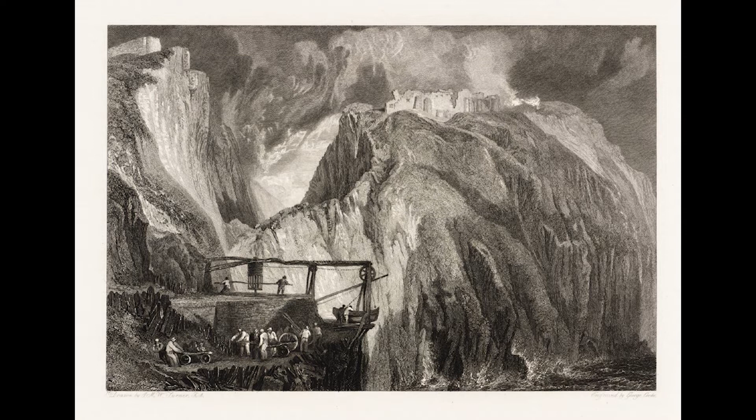By the Victorian times, it was a ruin. But then tourism was happening, and the trains were happening, and people started getting interested in tourism and going to see these sites. This was Turner. It was actually an etching after a Turner painting. But it showed that, and Tennyson went there and wrote poems. There's this increasing interest, and there's another Victorian layer to this site that was applied on top, while still being a functioning industrial port that was still trading tin and slate with the rest of Europe.

So we were confronted. That was it. We're on the shortlist. We go down. We meet Nichola, and she explains all of the issues with the site. And as designers, our first question was, help, how on earth are we going to build something here? There's no vehicular access. It's a site of special scientific interest. It's a scheduled ancient monument. It's every single acronym you could possibly think of. It has it. And there we were supposed to build a 65-metre bridge between two crumbling cliff faces.

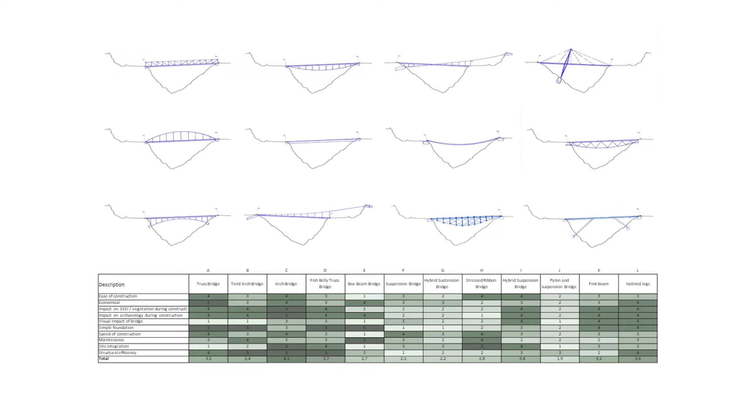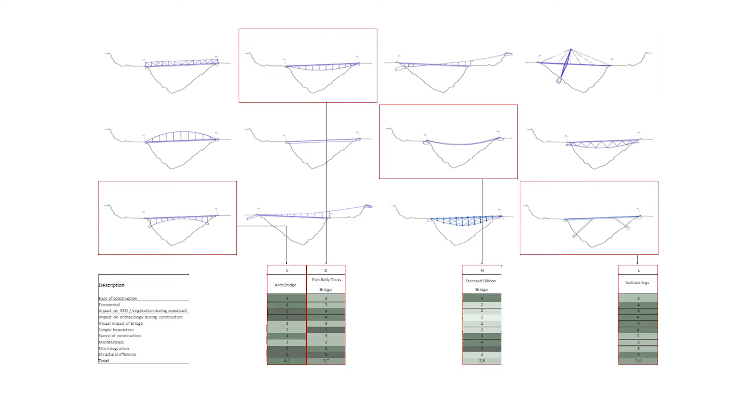It's a long drive down there, 5 hours, and we had a long drive back. And we came up with lots of ideas, which my colleague Florian was noting in the back, and we debated them. I won't go through the debate, but we then started scoring them and being quite analytical about this. A 5-hour car journey with an engineer is often quite analytical.

And there's a simple problem. The mainland on the left, 3 meters higher than the island on the right. So just to get my DDA bit in, 60-meter gap, 3 meters. It's already a 1 in 20 slope. And how are we going to link the two?

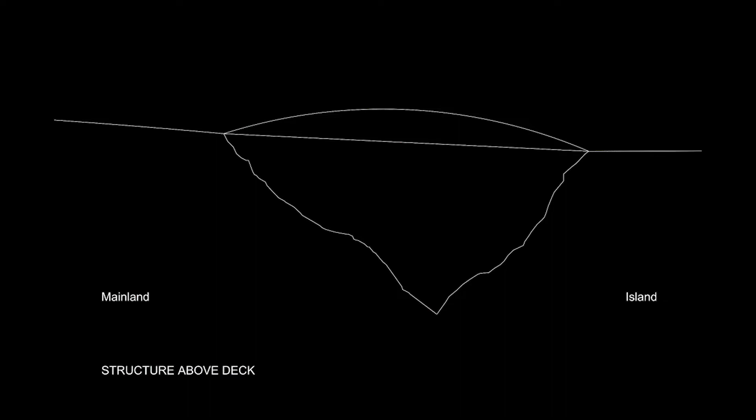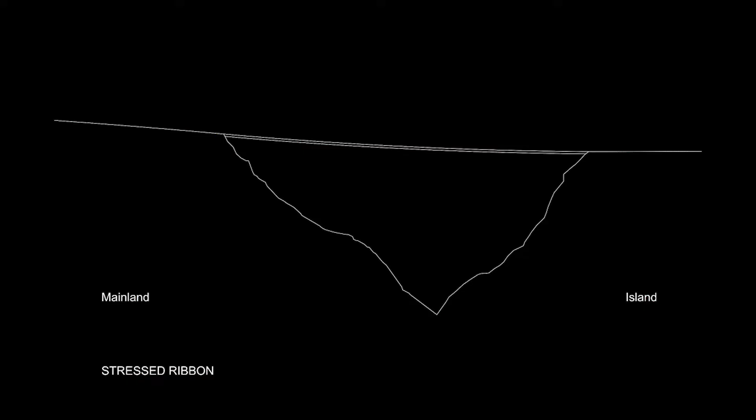First thing we agreed on is the structure should not be above the deck. We felt that we wanted that idea that you fly at some point. And so the structure, be it an arch, be it suspension cables, be it whatever it is, it should not be above the deck. That was inappropriate. I have to admit I was slightly smitten by the idea of a stressed ribbon bridge, which is quite a simple bridge. You stretch 2 or 3 or 4 or 5 cables between 2 sides, pull like a beast, and lay some deck on top.

Unfortunately, Laurent convinced me that the cliffs weren't going to take this. The cliffs were going to fall apart, and above all, we had an issue with the slope from one side to another, and that we couldn't make it. The idea wasn't to be completely DDA compliant, but at least step free from one side. Laurent liked the idea of an arch, as quite a traditional form in some way.

And the main issue with something like an arch is that it only fully functions when it's complete. So you have this temporary state as you're building it, when you need lots of formwork to hold it up. And how on this cliff, with the waves, et cetera, and above all the fact that we couldn't really do any temporary formwork, how are we going to build an arch?

And a boring factor about an arch is that when they expand thermally, they generally go up. They have to push up at the top, which meant that we'd have drawn a straight line from one side to another. And I felt that it was very important that actually this should be a fluid walk. When you come down from the mainland, you came down onto and hit the island in a smooth curve like that, as opposed to going up in the middle. We had some lengthy arguments about this and how I was fighting physics, and I really shouldn't be fighting physics.

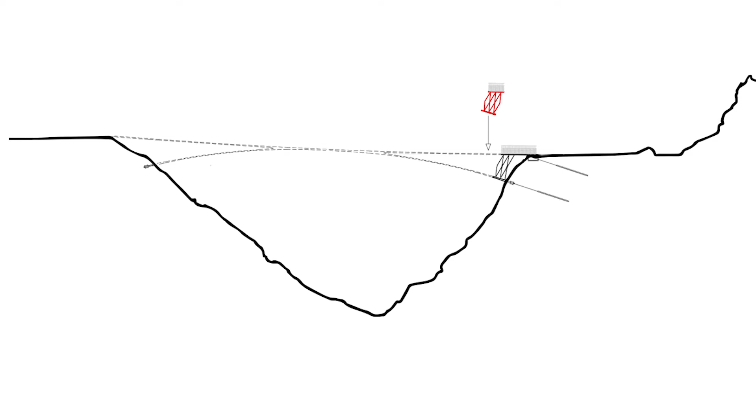Now, cantilever bridges, nothing new. Julius Caesar's favourite type, apparently. The Forth rail bridge is obviously the most famous cantilever bridge in the UK, where you reach out. There they had a little central span, but it's broadly the same principle. And it enabled us to build the bridge in segments. So we could divide the bridge up into 10, 15 segments, install one, and at any stage, if a storm came in, the bridge would be stable, and it didn't need any temporary formwork to hold it up. So this was it. This was the solution.

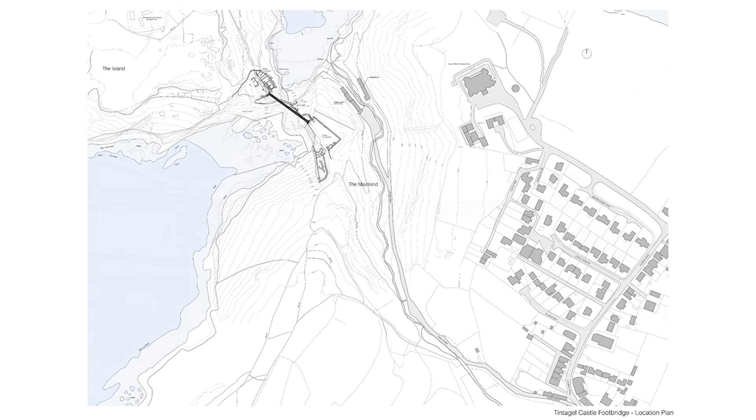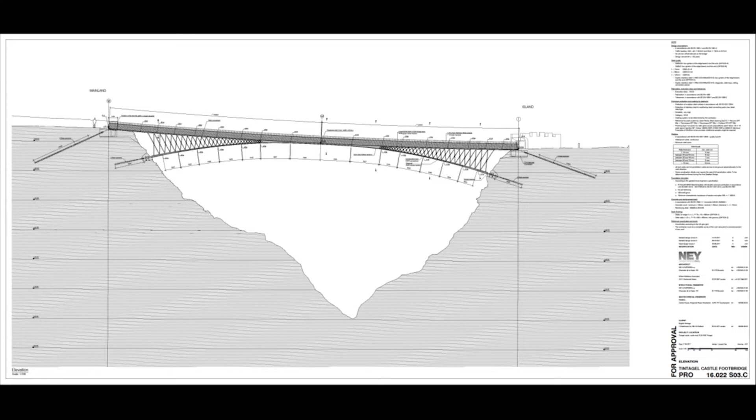In elevation, as said earlier, we divided the bridge up into 15 segments. We'd originally intended it to be a welded construction, but then went, for ease of construction, of installation, to bolted connections at each segment.

As a cantilever, this is the bit where my engineer friends are going to catch me out later. Obviously, the top of the cantilever is in tension. So we had a small concrete block, and then the 6 rock anchors drilled into the rock, 16 metres on either side, and they're acting basically always in tension.

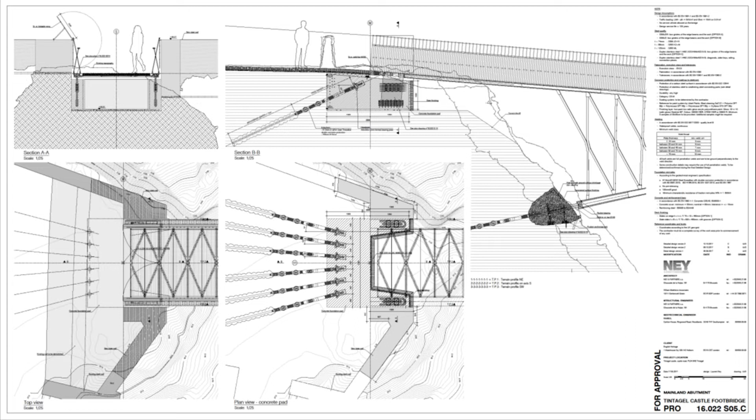And then at the bottom, on the lower chord, there's a smaller block, and the wishbones come in and they were generally always in compression, pushing into the rock. And that's replicated on both sides. We had to do, obviously, all of the trial tests, etc., to make sure it worked, and it does.

In section, underneath, the lower chord is a wishbone, so it tapers down to this single point, and then the deck itself is a variable height, but a constant width.

All of the material is entirely steel, and it's a mixture between mild steel and duplex stainless steel, which we did for longevity. This bridge is not over-specified, but one of the aims of the brief was it's going to last for at least 150 years. There's no reason why this bridge couldn't last much, much longer. If it's maintained, it should last for many centuries.

Then, again in section, the bracing between the two elements. Laurent is a big fan of British engineers, and one reference that we both loved was this bridge by Thomas Telford in Scotland. So we referred to the bracing between the upper and lower chords as Telford bracing. And there's a sort of fineness to it that adds that grain and gives it a sort of, I come on to this word, timeless feel to the actual design.

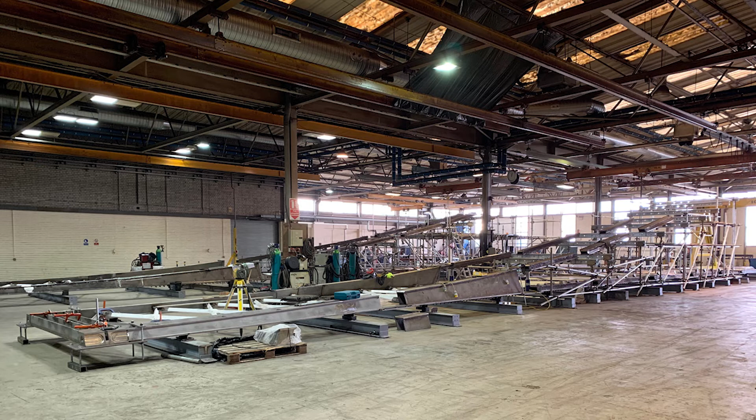The bridge was assembled or fabricated in Plymouth, so a few kilometres from Cornwall, but as close as we could get. In 2 complete halves, they're built next door to each other, and a full trial erection was done in the factory.

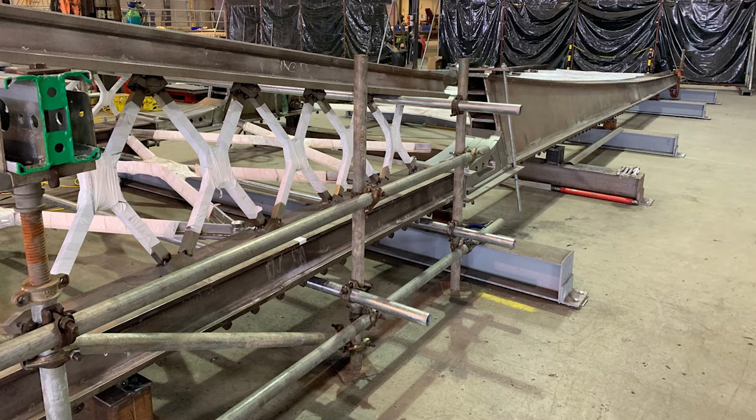Here you can see the tip of the bridge on one side with the mild steel upper and lower chords. The Telford bracing is duplex stainless steel. Duplex is the highest grade of stainless steel you typically use in construction. And it's not completely rust-free, but it's as close as we get.

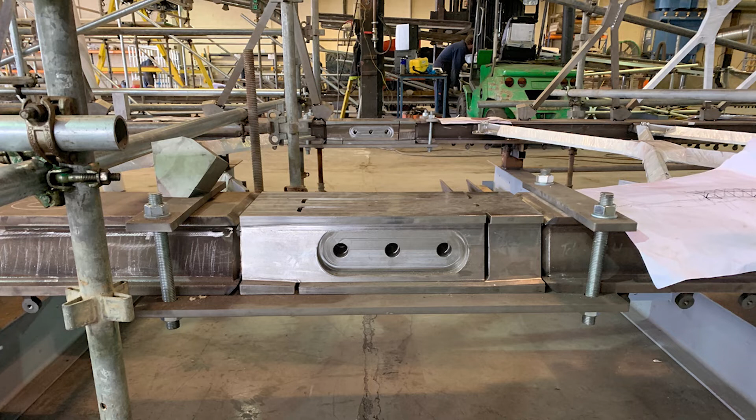And here's the connection pieces. Again, for a normal bridge, most engineers would agree, you wouldn't normally make these out of duplex stainless steel. You make these out of mild steel, paint them, and then hope for the best. By making them out of duplex, we don't have to periodically check all of these connections. And if it's mild steel and it's corroding, there's not much you can do about it. You know it's corroding, but you've got to take your bridge apart. Doing it this way, we know it should not corrode in all of these connections.

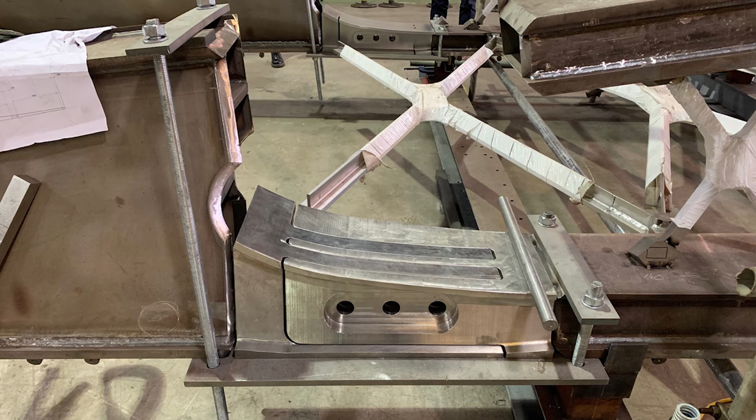Now that in itself added £500,000 to the construction cost, just doing that. And if there's one thing I would never do again, it's machine duplex stainless steel. It's a silly thing to do, but it was the right thing in this particular case. And then this is the actual connection piece in the middle, where the two cantilevers come together, with a small gap, 40 millimeters, allowing for thermal expansion between the two halves.

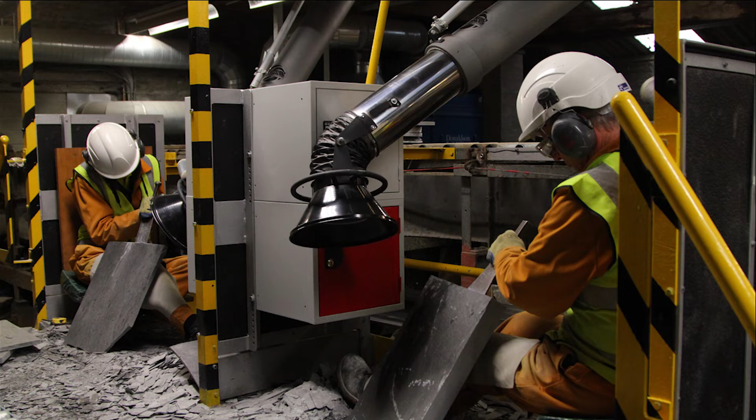The deck. Now, one of the disadvantages of putting all the structure below the deck is there's not much on top of the deck to look at. And obviously that experience of walking across was critical. And we proposed slate. I seem to remember some reference from Nichola about kitchen flooring or something. So we went for 40,000 hand-split Delabole slates, all laid on edge. And again, it wasn't an economical choice, I have to admit. But everybody, when they walk across the bridge, there's that tactility to it that's beautiful.

Other than the deck itself, there's a balustrade. And again, for me, one of these things about architecture is tactility. What is the handrail going to be like to touch? How protective do you feel? You are 50 meters above sea level at this point.

And getting a little clin d'oeil, as the French would say, to Arthurian Excalibur swords in the handrail. These were all waterjet cut stainless steel, duplex stainless steel, with a small twist on the top, which gave us this A-frame. So actually from 10 millimeter sections, we created a very rigid handrail, but gave a sense of protection when you're walking across it, but also a sense of transparency when looking

from the side. And the duplex, again, it was electro-polished, which makes it very shiny. I was worried it was too shiny, but maybe things can't be too shiny. A little bit of kitsch is always good.

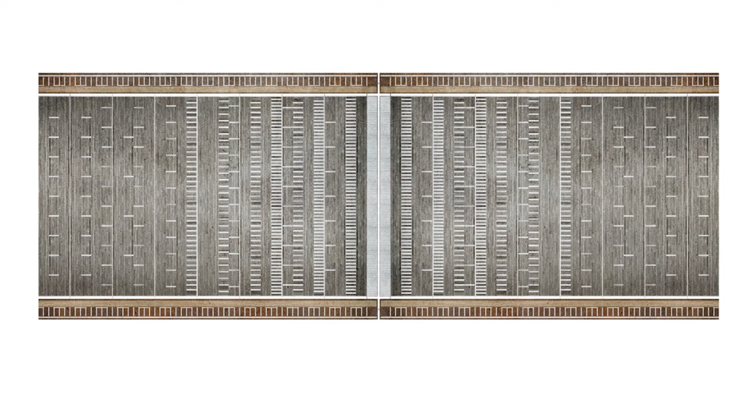The deck. One thing we haven't mentioned is that the site actually is part of the Duchy of Cornwall. And Ben Bolgar from the Prince's Foundation was on the jury, a very active member of the jury. And the design was sent off for Prince Charles's review.

Review is a tricky question because I remember taking a bit of handrail of the previous and a bit of slate deck to Poundbury, and we rang up 2 weeks later to say, so, yes. And it's, oh, do you want it back? Can we keep it? Yeah, of course you can keep it, but that was the feedback we got. So my assumption is he quite liked it. But there's that one comment about, could we introduce a small element of pattern into the deck, which was fine. I thought it was a good point.

So within the slates, we took the influence that actually, if one looks at the rock formations around Tintagel, there are these quartz incisions in the rock, and on the typical slate walls, the image on the right, the quartz is often left on the top, being the most robust material. So within the actual slate pattern on the deck, there is this slight rhythm of quartz incisions leading up to the middle.

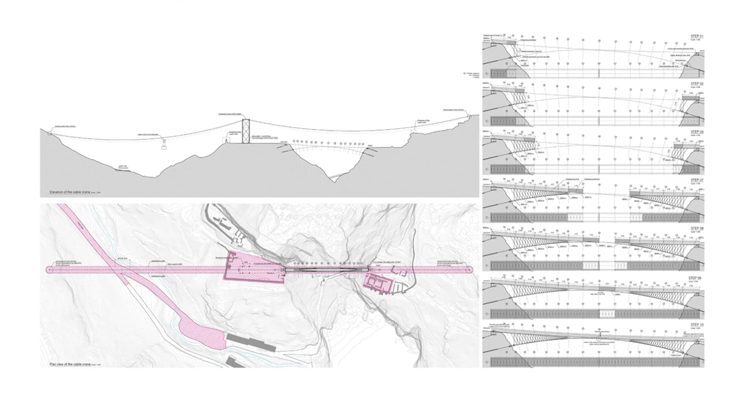The installation, going back to the beginning, how on earth are you going to build a bridge here? We looked at helicopters. There are big helicopters in Russia, but they aren't allowed to fly in the UK, which is a relief. So we looked at a cable crane, common in France for building ski lifts and other things. And the idea of a cable crane is you align it on whatever you want to build, and then you can bring in sections and drop it into place.

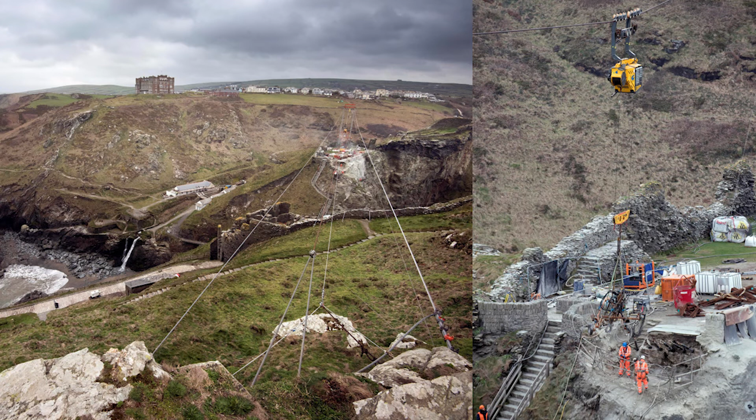So the bridge was cut up into 15 sections, a temporary pylon built by some Frenchmen from Grenoble. And this pylon, you can pack it down and carry it up a mountain. Then there's a small mountain here. But then along that line, there's a cable that's exactly on the alignment of the bridge. And along that line, there's this little thing on the right here, which can pick up 5-ton segments. And so the bridge was chopped up into these 5-ton segments, and then brought in.

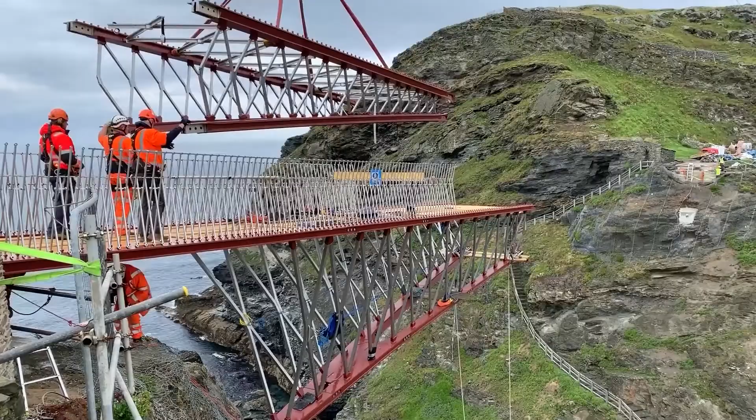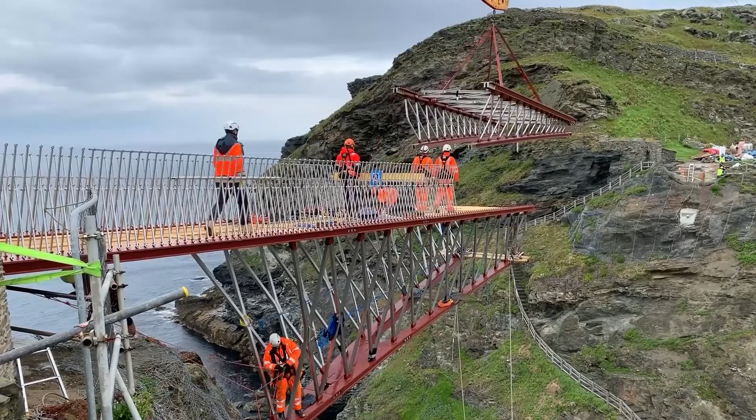Here's one of the tips coming in. This is accelerated, it just wasn't quite as quick. And we'd planned to do these, in theory, one a day. At peak, we were doing 3 sections a day. So the whole bridge went in less than 2 weeks. We'd allowed 3 or 4 months because you just don't know what the weather's going to be like.

In the end, and this proves it's a cantilever, just in case somebody doesn't believe it's a cantilever, 2 sections came in. And the actual installation went very smoothly. We were very lucky with the weather, and they did actually all bolt together, which was a relief. Some finished photos of the project, and some drone footage, which was put together.

It's a funny... contextual and timeless are words that architects often use, and I always slightly shudder at both. I quite like both, but I'm always saying, well, what is contextual? What is timeless? We felt that for this project, obviously the context was so strong. Often building in heritage environments, there's this urge to either mimic, to ape what was built there before, or to overtly or excessively contrast what is there. We've all seen the glass boxes on the side of the old building kind of thing. And that felt wrong here.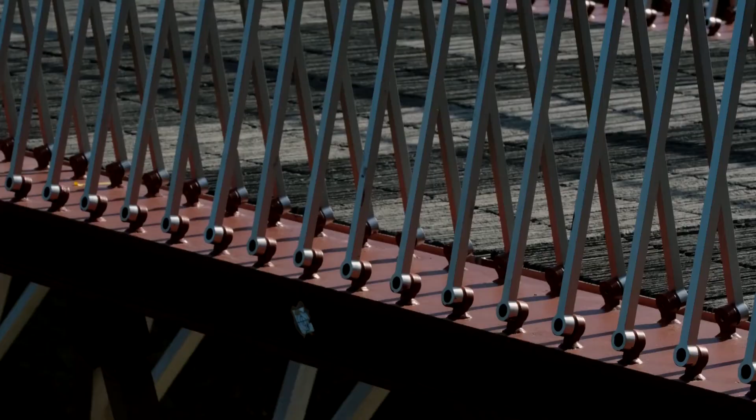Yeah. And the fact that actually the slate deck, the slates have worked loose, and there's this funny crunch when you walk across. Oliver Wainwright likened it to walking on a box of After Eight mints. And there's the noise and the tactility that you feel under your feet. And that sound was, again, one of those factors that makes it... okay, at the end of the day, it's just a bridge. It just goes from one side to another, but it's quite a fun way to go from one side to another.

And finishing off with a few more photos, a view I hope none of us will ever get, but it's... and that idea of layers of history. This is a site that has that early Middle Ages, the 4th century. It has the 12th century. It has the Victorians, and we have added another layer, another artifact to this site. Rather like here, the way the mist sort of creates those Chinese layers in the image, and it's our contribution to this amazing location.